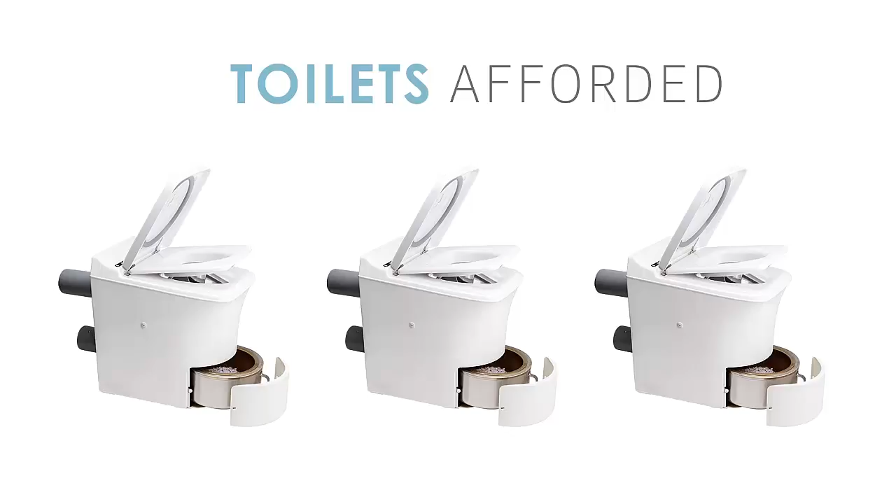Our vision includes distributed wastewater treatment. We favour the Cinderella incinerator toilet, in combination with reverse osmosis treatment of grey water, at this stage of my investigation. Two or three toilets can be afforded for the savings made by not connecting to the reticulated community-wide system.

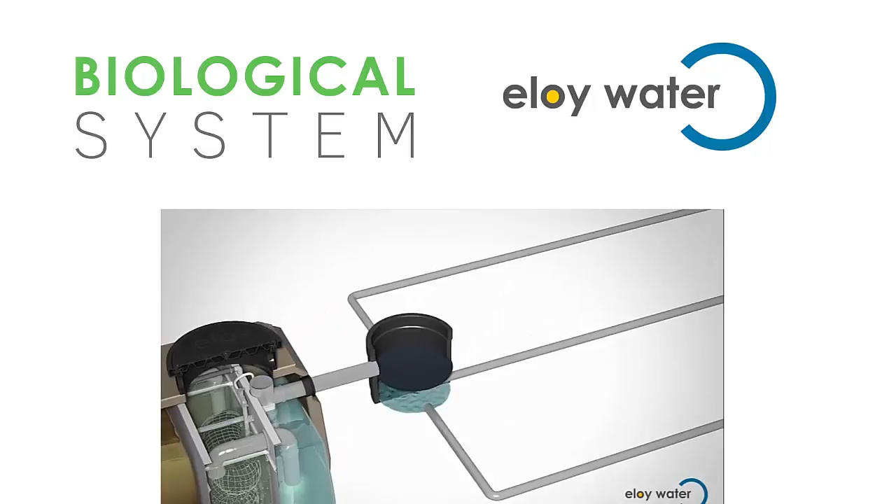A biological system such as that offered by Eloy Water is also suitable for small lot development. A couple of 100 square metres is all that is required to disperse the output from such a unit.

A subdivision-wide energy cogeneration wastewater system, where the outputs are clean drinking water and electricity, has its appeal, but doesn't fit with our current financing model and decreases the resilience across the system.

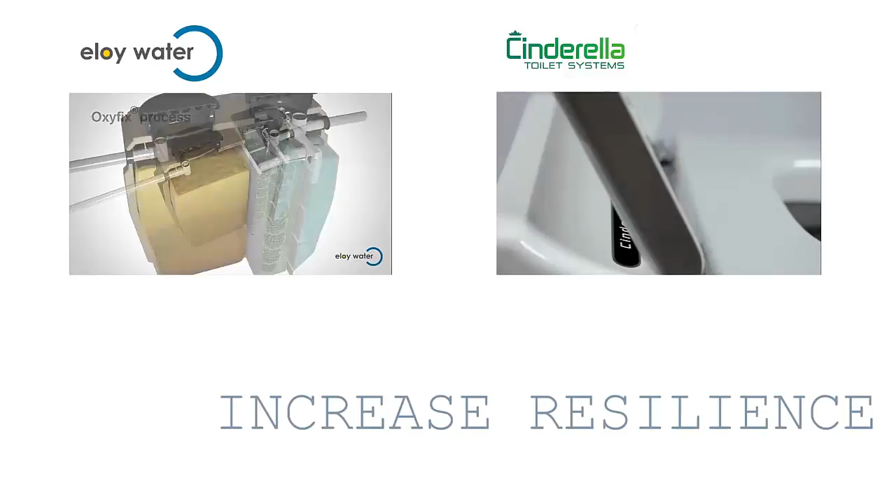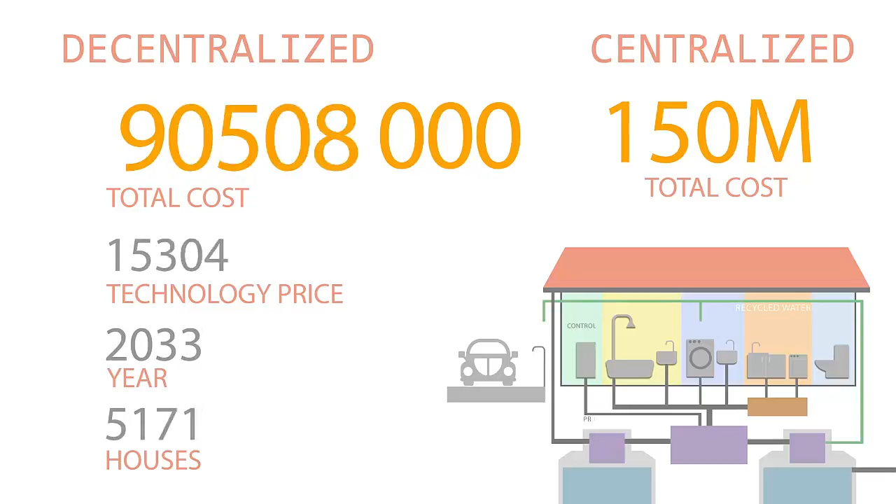Any one of these distributed systems could replace the $150 million spend currently proposed. Effectively, instead of an upfront capital cost requiring financing with inherent interest charges, each new residential or commercial building builds out the wastewater infrastructure, exchanging development contribution fees with a technology spend in each property.

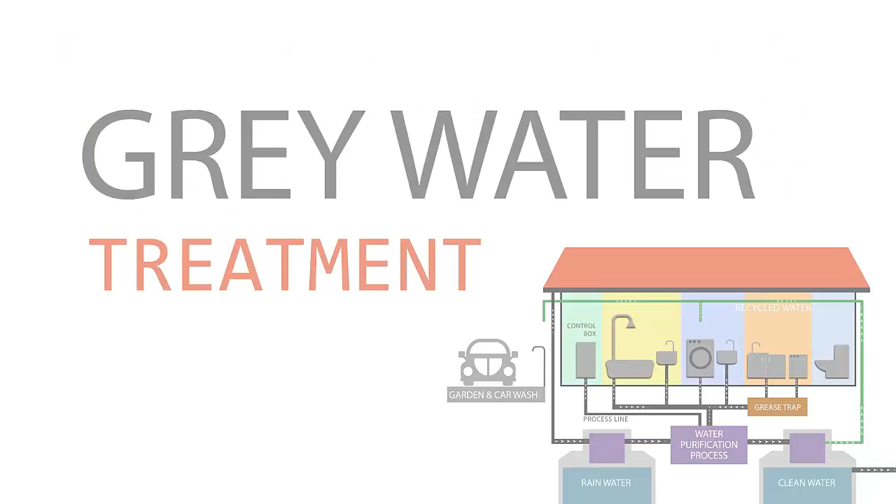Admittedly, if we go with an incineration system for blackwater, we are left with grey water to contend with. A system such as this copes with much of the issue.

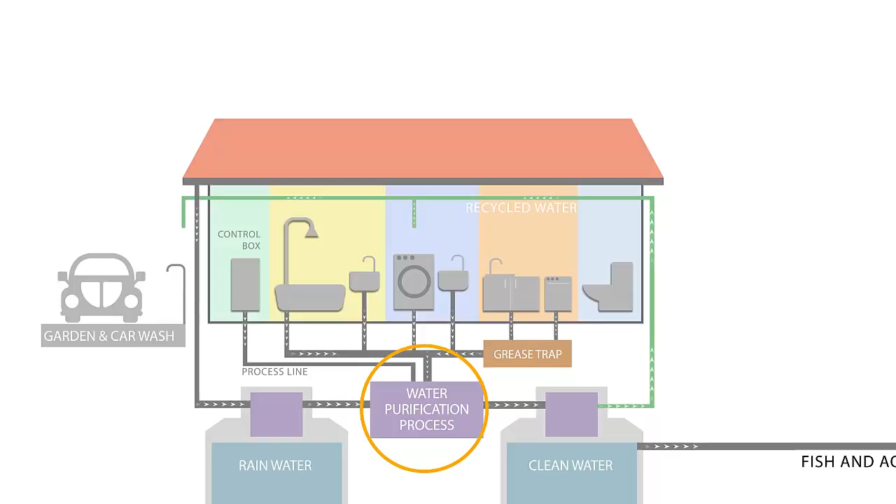Water from the kitchen sink and dishwasher needs to pass through a grease trap prior to entering the grey water recycling system. If the output from this system passed through reverse osmosis filtration or compressed vapour distillation, the resulting water would be drinkable.

Unfortunately, we don't think the market is quite ready for that degree of recycling just yet. At this stage, we anticipate reuse in a drip feed irrigation system and for clothes washing.

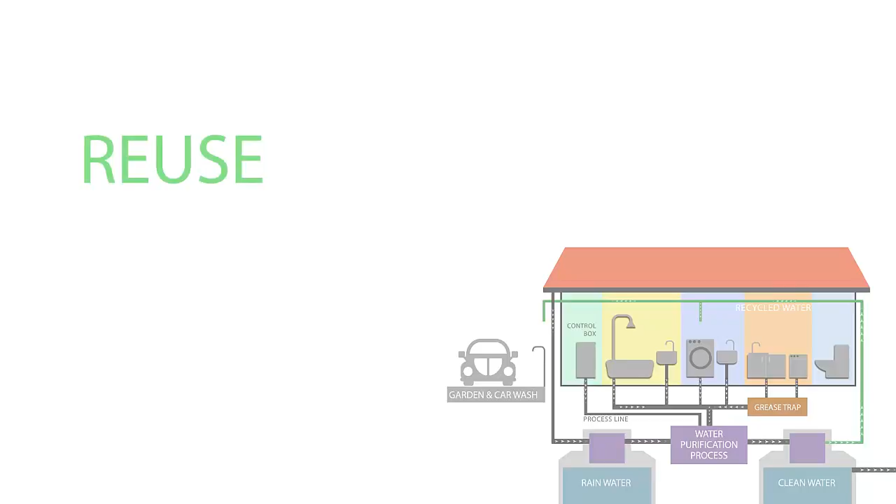We plan on recovering some of the energy involved in disposing of blackwater waste using the hot water system.

To more than offset the loss of food production capacity of rural land converted to urban development, we intend to produce protein in the form of fish and carbohydrates in the form of vegetables locally on each plot of land.

These will be centrally managed and controlled, requiring no intervention by the homeowner.

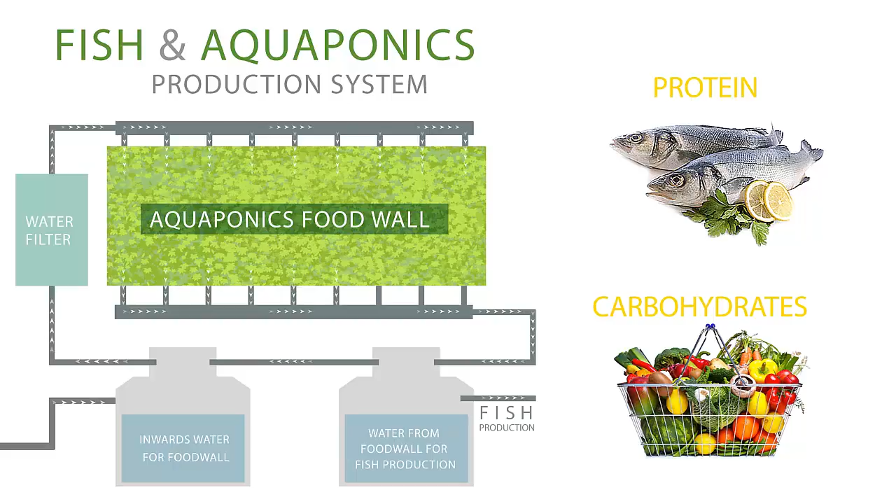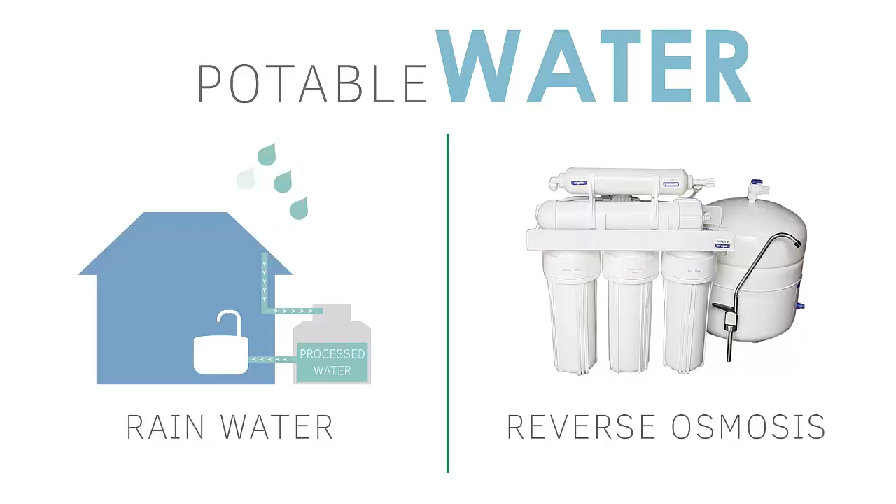Potable water from rain can be collected and stored and made pure through a whole-of-house inline reverse osmosis filter system, possibly in combination with inline ultraviolet treatment.

Water can be pumped from artesian sources in times of low rainfall for additional resilience of the system.